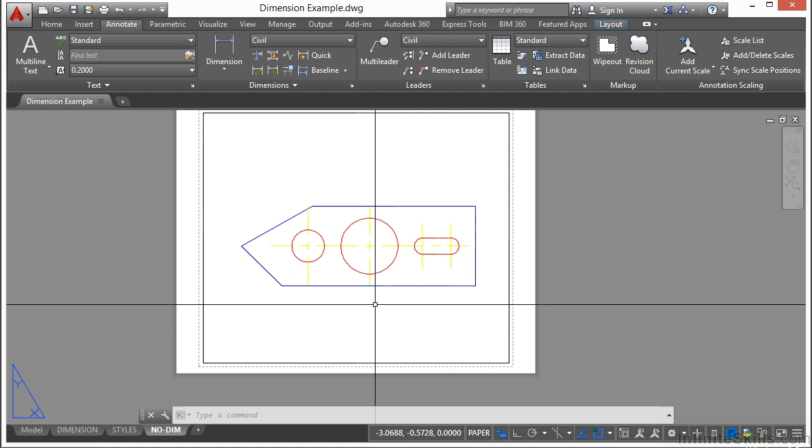So right now with it set to 2, if I draw a dimension here, any type of dimension, and then I go to select it, you see it's a dimension object. If I open up my properties palette and I select it, it tells me it's a rotated dimension. That's the type of dimension it is.

Now, if I go to my DIMASSOC value and I turn it to 0, of course, this dimension will stay the same. It was already drawn in. But if I create a new dimension, I get a lot more options. This is the very, very old setting for dimensions that we used to use before associative dimensions. But it's still here. It's a legacy command. And when you go to use it, it asks for a lot more information, like the value.

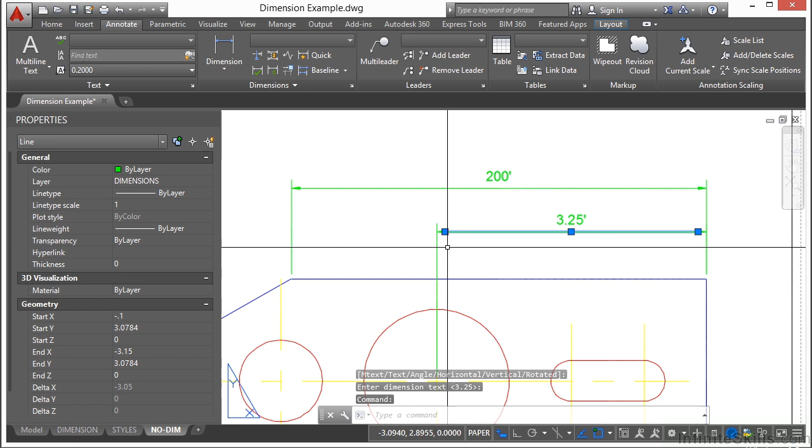Once you type it in, you can see here, this is not a dimension. This is just a series of lines. It's also a text object. And we have an arrowhead here that is really just a solid. So I can't easily change or edit it like I can here. You don't want to use this unless there's something absolutely strange about your dimension that you can't get to work right. So that's what that setting does.

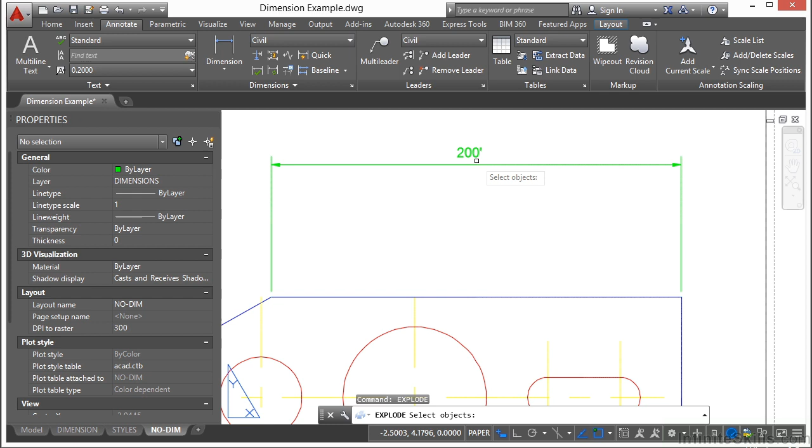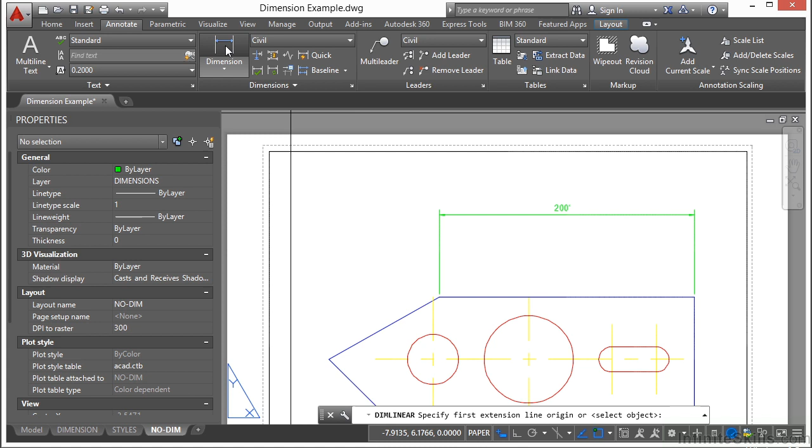Now, if you explode a dimension, that's kind of the same result. It just turns it into a bunch of lines, text, and solids. Now, there's a difference between setting 1 and setting 2. A lot of times you'll find older files set up this way, set to number 1. Number 1 turns them back into a dimension object. So now when I create this dimension and select it, it's a dimension object, same as if I select the old one. I'm going to erase these to get them out of the way.

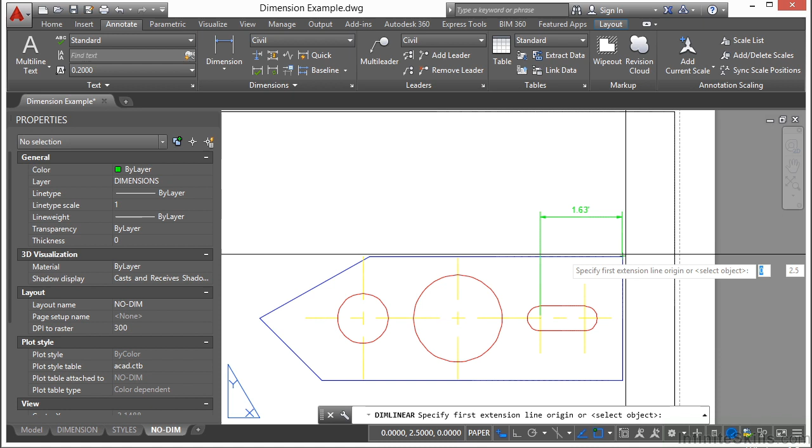But this is a setting where you need to manually set your scale. As you can see here, this dimension is 1.63 units. If I set my DIMASSOC setting to 2, and I dimension the exact same spot, you'll see I'm getting a different value. Setting 2 associates your dimension insert points to the object in model space that you pick while you're dimensioning in paper space. Setting 1 doesn't do that. It takes the absolute true length of what you're actually measuring in whatever space you're in, be it model or paper space.

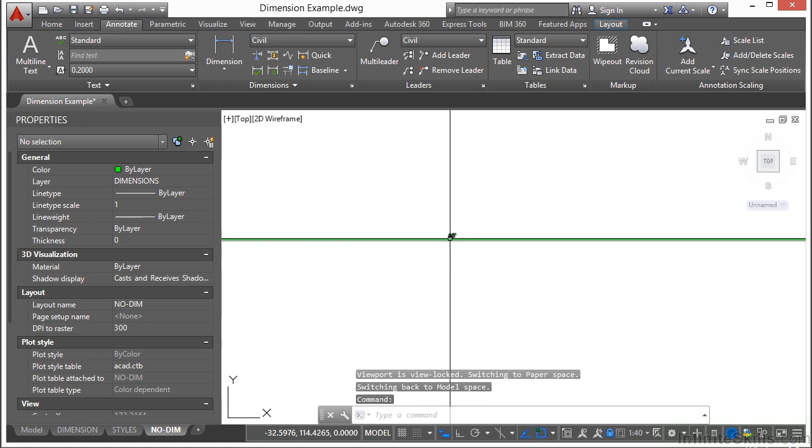So if I double click inside this viewport to activate it, change my DIMASSOC setting to 1, and dimension this, first of all, my dimension is not to scale, so it's not showing up right. But as I zoom in, I get the proper length, 65 feet. Same as in here. Setting 2 allows you to work in paper space. It measures the true distance involved, not the viewport scaling. That means that you can make one dimension style regardless of the scales used.

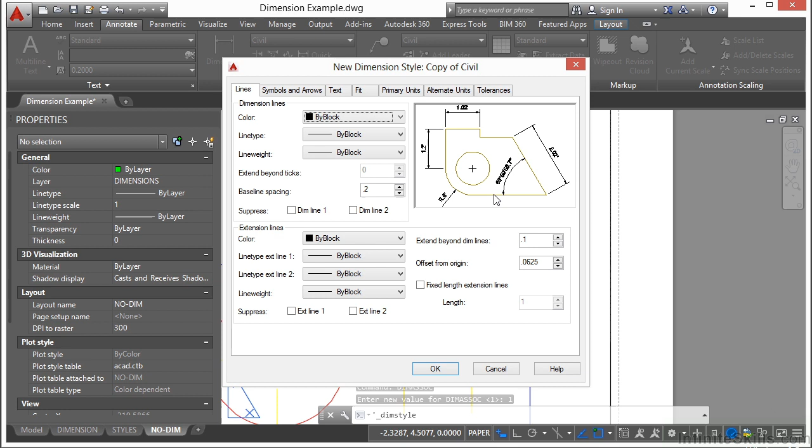So if I'm using the DIMASSOC setting of 1, in order for this to scale properly, I have to go into my Style Manager and set up the scale of my drawing right here. So if I change this to a scale factor of 10, set that one current, and make a dimension here, it scales up the value that it's measuring by a factor of 10. So you can see here, this is 1 to 1, this is 1 to 10, and this is a true value based on the viewport scale.

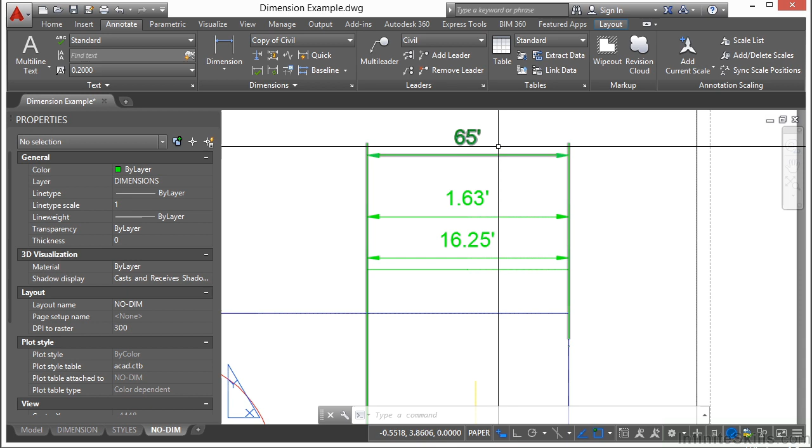Setting 2 is easier because if I have multiple viewports at different scales, which you will often do, especially on architectural or mechanical drawings, then I don't have to set that up. I can just go with it. Also, the setting of 2 works everywhere. It works in paper space and model space. Some people prefer to dimension in model space, some in paper space, and sometimes you may need to do both. I don't suggest that, but sometimes that happens. Setting it to 2 means there's less work for you to do.

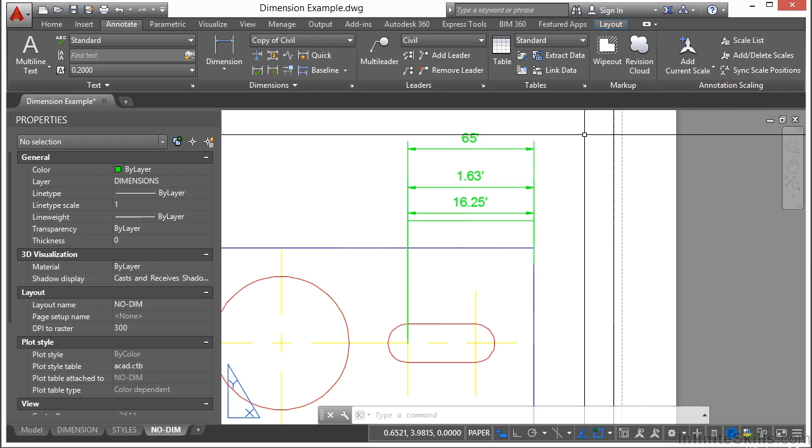The settings of 0 and 1 are legacy settings that are still there because Autodesk never gets rid of old commands or system variables. They bury them deep in there, but they keep them, and that's the legacy thing you might come across from time to time, but just set it to 2 and everything will work fine. So if you get a drawing from somebody and it's not measuring properly when you do your dimensions, check that setting. Also check the scale factor in the dimension styles, see if that's doing something crazy, and keep an eye on that if it's not looking right.